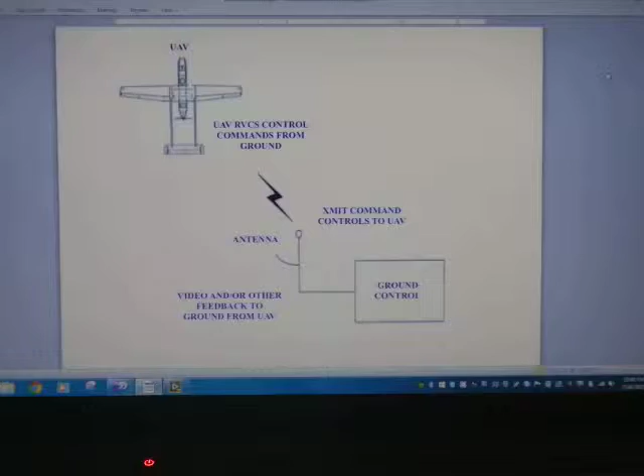Hello everyone, my name is David Rivera. I'm an electrical engineering student with the University of North Dakota. My lab partner is Clarissa Gonzalez. She is also an electrical engineering student. And our proposal is to convert a UAV using LabVIEW and a DMX controller for flight control.

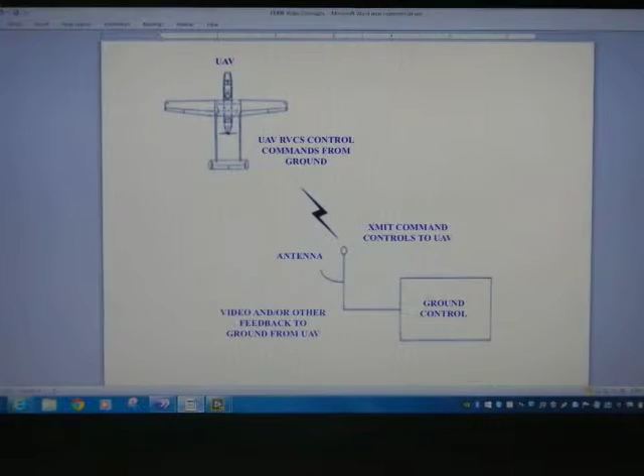The background is, in 2003, a group of students from the University of Minho in Portugal created a UAV controlled by Bluetooth and Arduino technology. This was performed simply because they wanted to increase the flight range of the UAV. By doing so, they had to eliminate weight. Limiting the weight of the UAV increased the range, and therefore they accomplished their task.

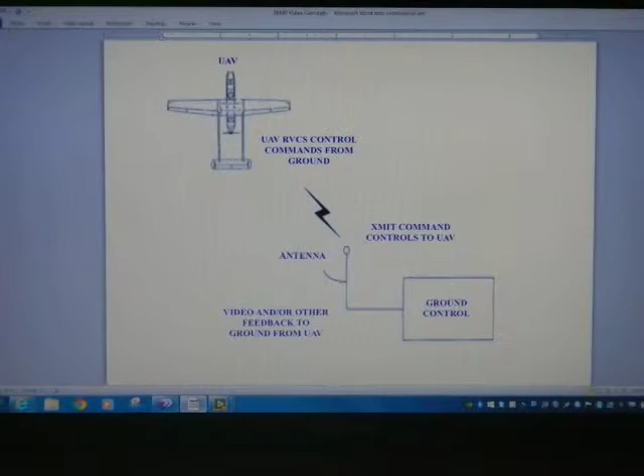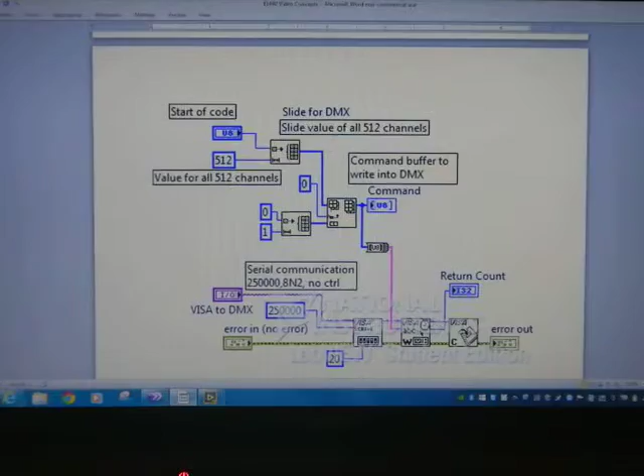I am proposing that we further reduce the weight of the vehicle in order to increase the range much further, or increase the flight time. By using LabVIEW and the DMX slide controllers, we are basically looking at controlling a UAV and each of the servos and input and output ports in cooperation of electromagnetic devices necessary to convert a selected 8-bit code for proportional analog positioning in order to control the UAV flight controls.

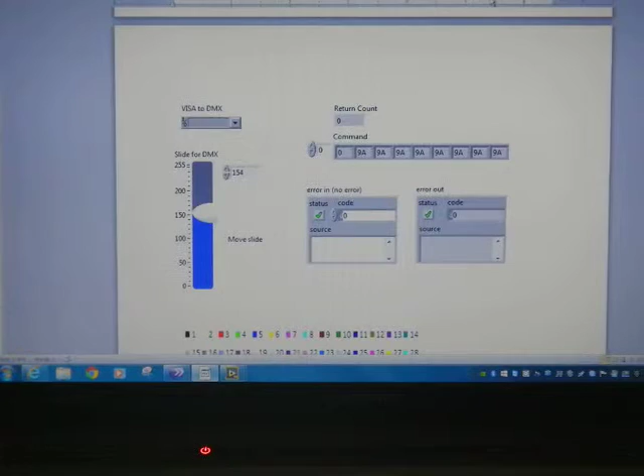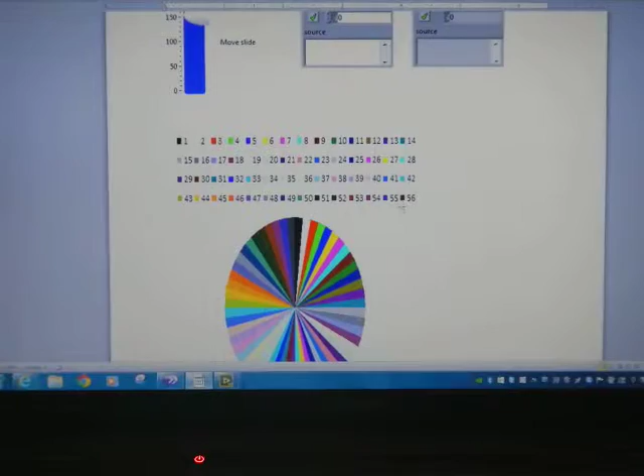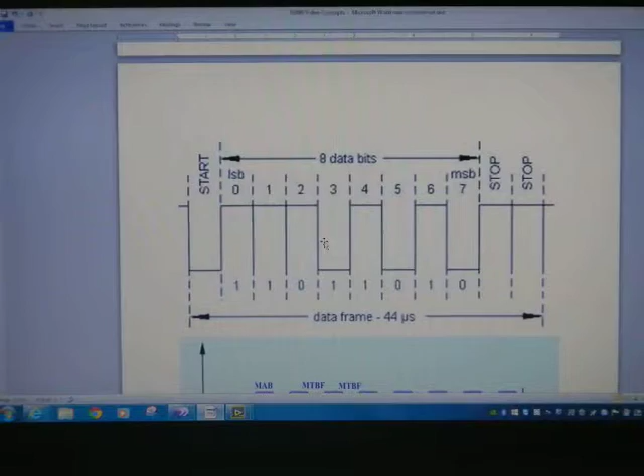Basically, what we're doing is we'll slide that UAV DMX control to a position, and it'll output a code. That code would translate to a color. This disk is rotating at 1000 RPMs, and as the codes match, that 8-bit data signal is generated in order to control the peripheral that we are commanding. All the channels will look similar to this, with a break, a MAB,

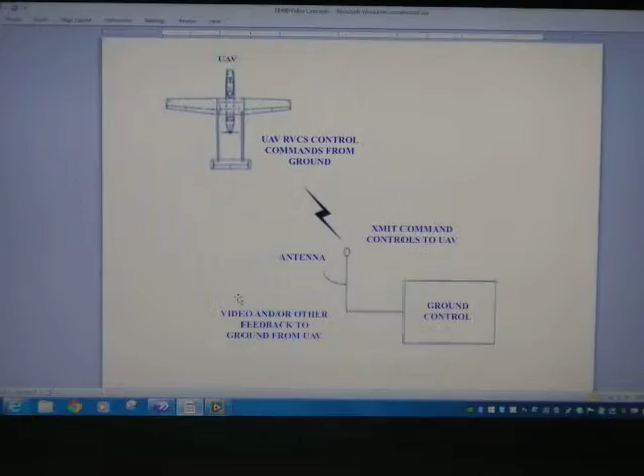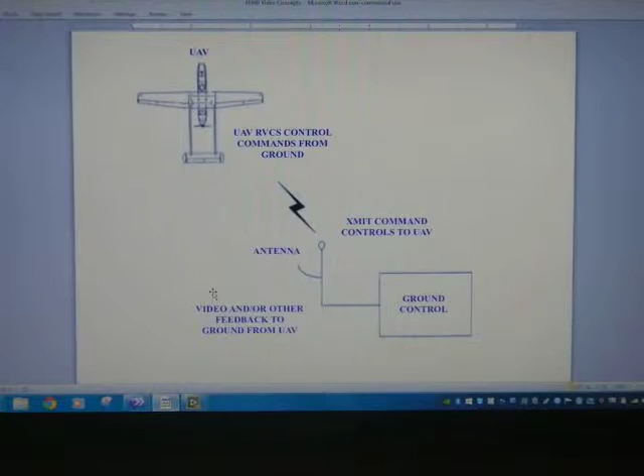I know it's taking a long time. Ready? Just pick up where you left off. Yeah, okay. Ready? Mm-hmm.

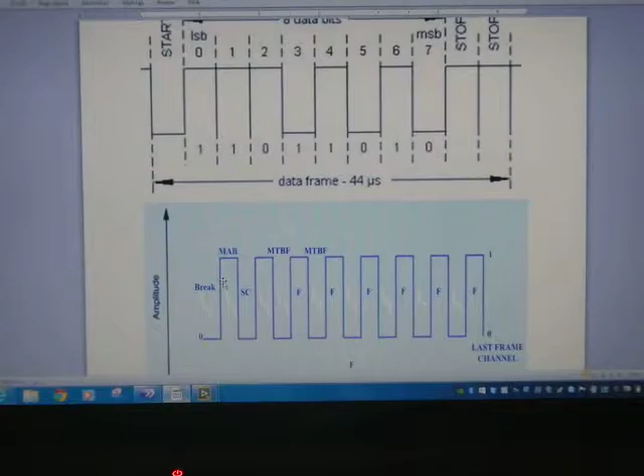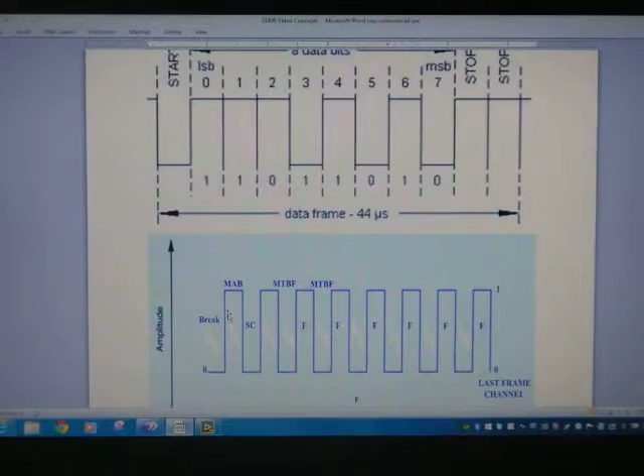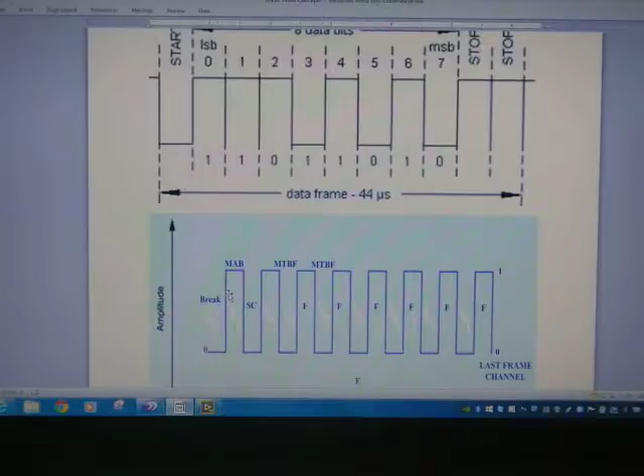This is making so much noise. You ready to start again? Mm-hmm. Go. The 8-bit signal is comprised of... No, let me start again.

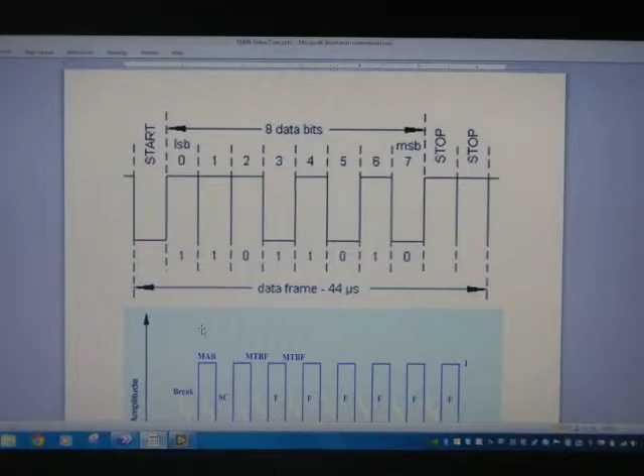God damn it. Okay, ready? Mm-hmm.

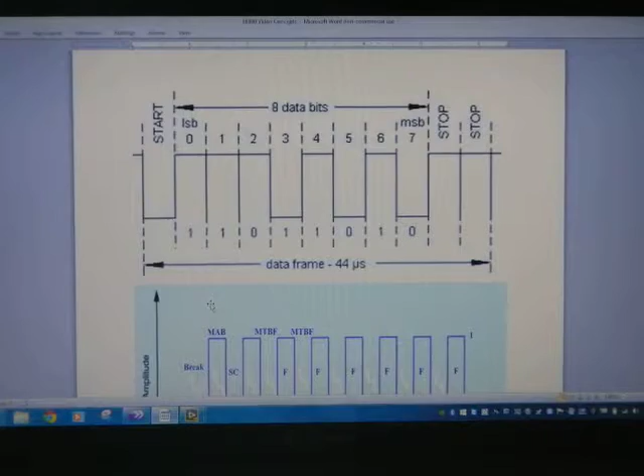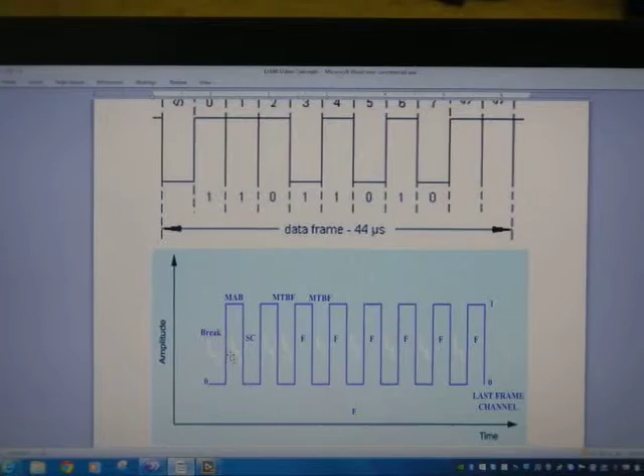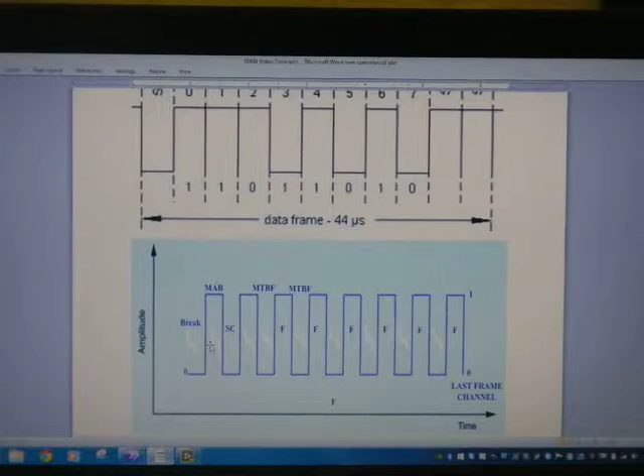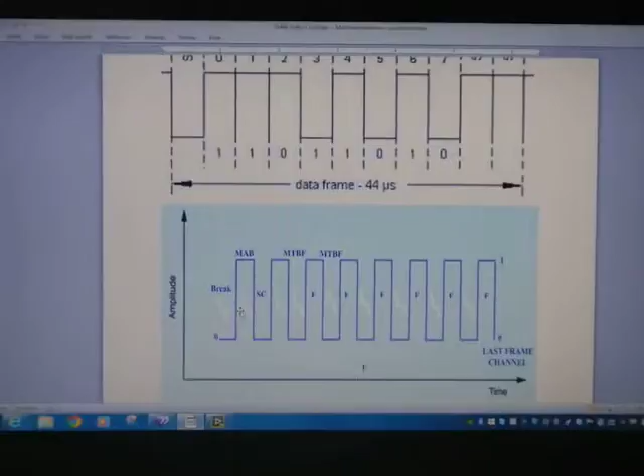Okay. Hold on. When you move your head back and forth, try not to be so jerky because I'm still leaning up against this thing. Well, that's why I asked you not to do that. But your computer's on your lap, which is also moving with you, so I'm not looking as bad, but it's just hard to keep it all straight, okay? Whenever you're ready.

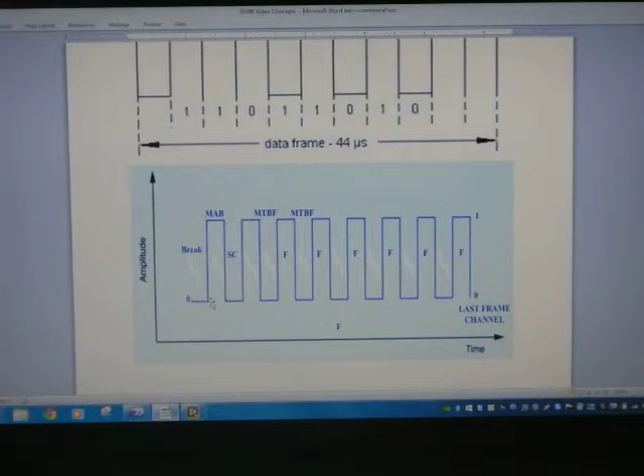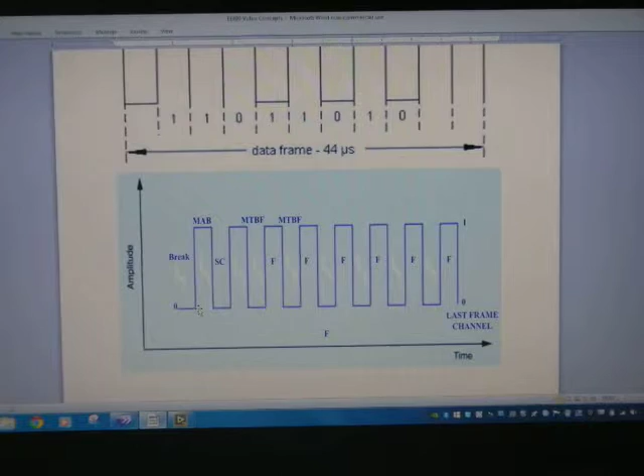The data frame is 44 microseconds long, consisting of 8 data bits, from the least significant bit to the most significant bit. The frame itself has a break, a MAB, which is a mark after break, an SC start code, MTBF, mark time between frames, a CD channel data, and then the last frame consisting of the end of the code.

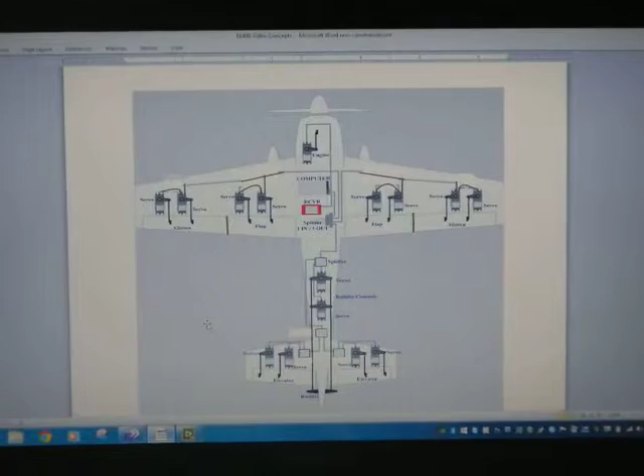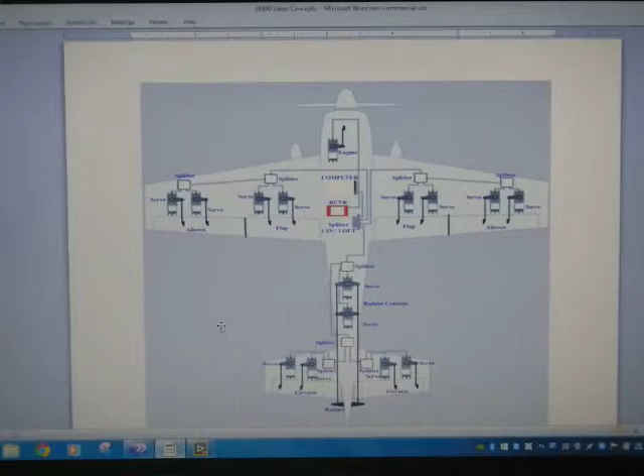These codes are basically to control the servos within the UAV. Each servo has been designated for the ailerons, the flaps, also the rudder control, and elevators. The depiction is without splitters. The second depiction is with splitters, further reducing the weight of the aircraft and allowing increased range.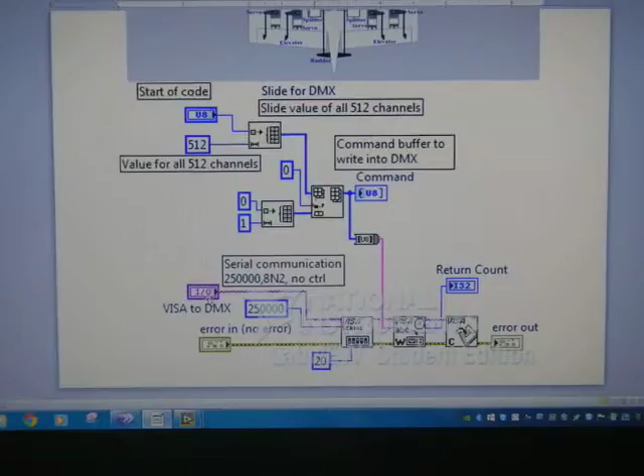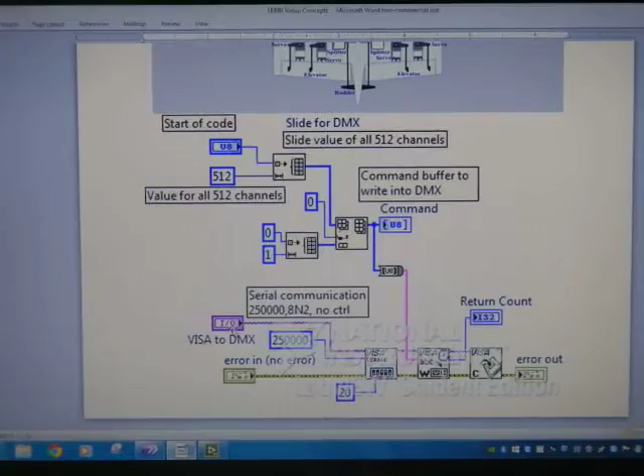The start of the code uses the value between 0 and 512 channels into a build array. This build array will eventually output into a command buffer to write the DMX code, which is virtually used as part of the VISA control. VISA is a LabVIEW control for GPIB, serial, USB, Ethernet, PXI or VXI instruments, making the appropriate driver calls depending on the type of instrument communications.

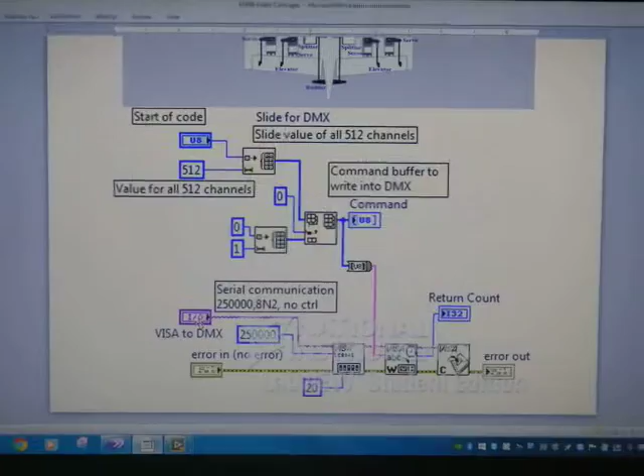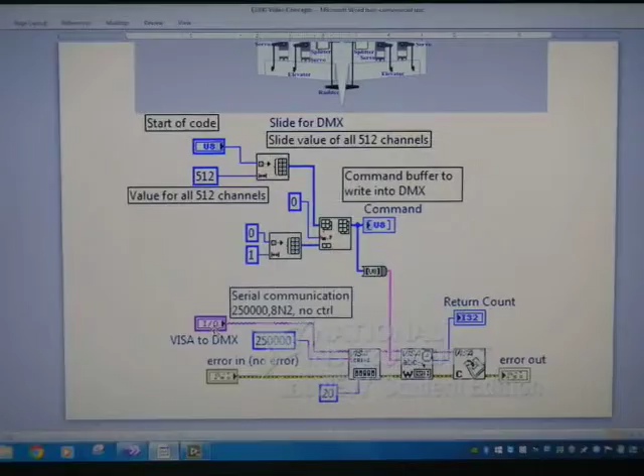Basically, VISA allows the command controls to output the signal of the strobes that are generated from your rotating disc. The communication of this light or the color signals can be transmitted using fiber optic cables, further reducing the weight by eliminating bundled wires of various sizes.

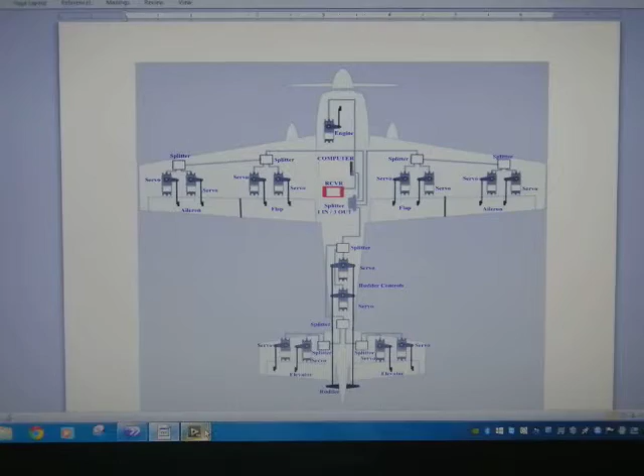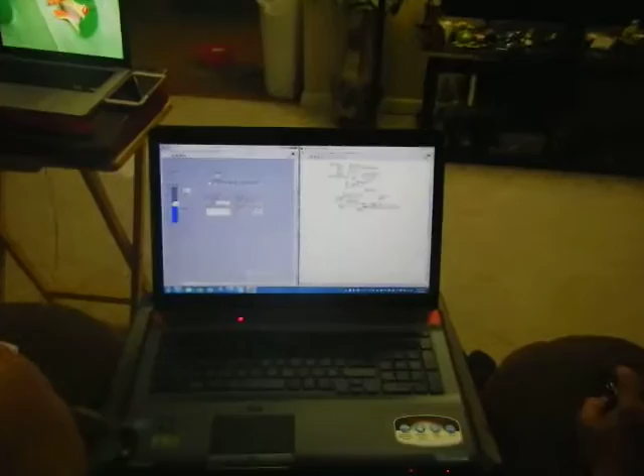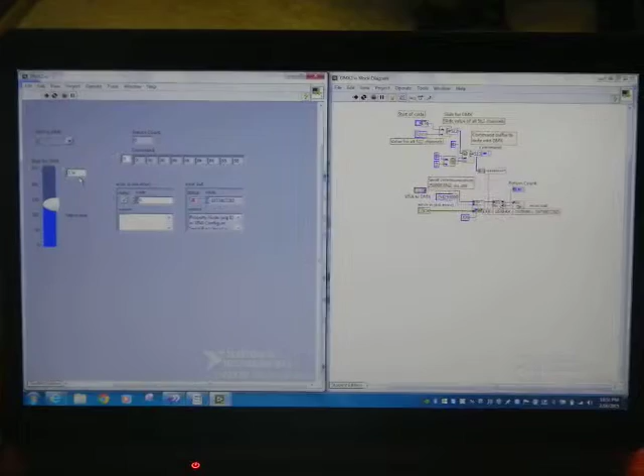To demonstrate the code for this UAV, I am going to open up LabVIEW. I'm going to select a continuous mode so I can vary the output. And as I vary the output and it updates the system, the command control continues to function as directed. Here's a channel selection of 134. The output command is 86. By further decreasing the slide for the DMX, as the system updates, the command updates to 55.

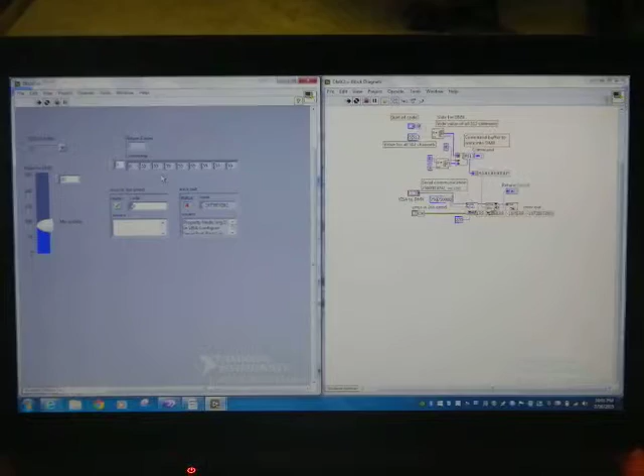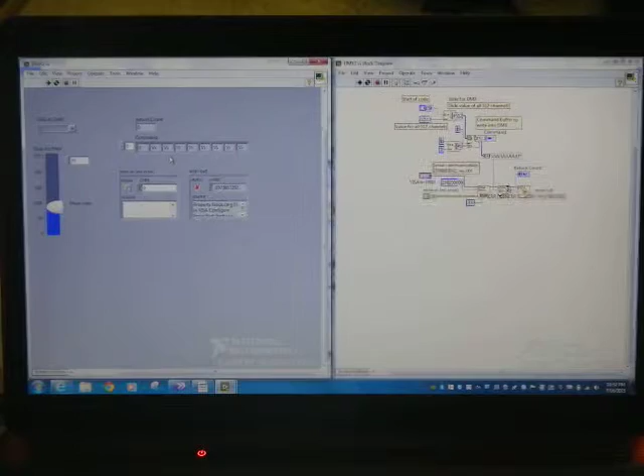The assignment of the codes is based off of what we wish to control using analog controls and technology. For example, engines on/off can be a designated color. Ailerons on/off can be another color. Flaps another color. Engines and rotors and rudders all can be assigned different colors of the spectrum in order to fulfill flight needs.

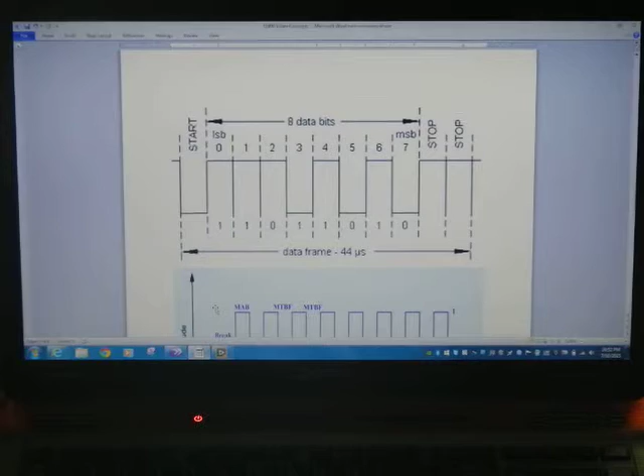Here's the color codes for a basic DMX technology, which only has 256 codes. Each code can be designated by a group of frequencies or data bits. This concludes my period of instruction.

Okay. Okay? Well done. Yeah. You're gonna hack it and